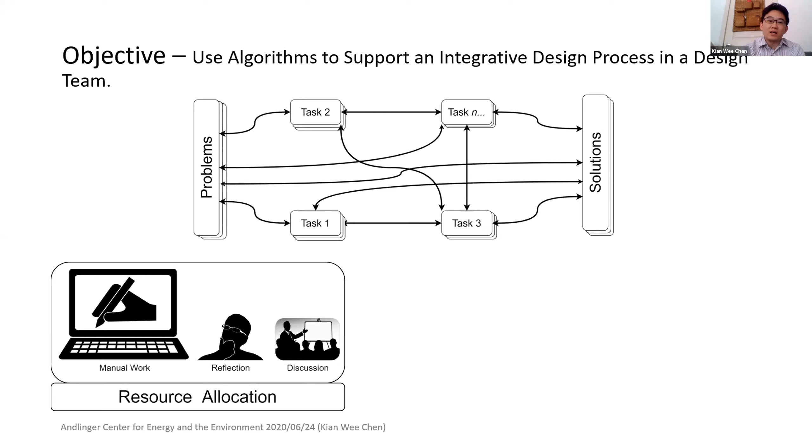The main goal is that currently we spend a lot of time doing modeling, especially in a multidisciplinary design team where you have to deal with different models working together, different protocols, hardware, software, interfaces, such that you spend more time trying to get this task ready than having time for reflection and discussion.

The whole idea is that you can inject algorithmic work into the process so that a lot of this routine task can be automated—what I call algorithm-assisted work—giving you more time to spend on reflection and discussion between different disciplines, where most of the time we do not have a common ground or platform to understand the problem well. So the use of computation and algorithms would help us have better interpersonal communications and discuss intersections between disciplines.

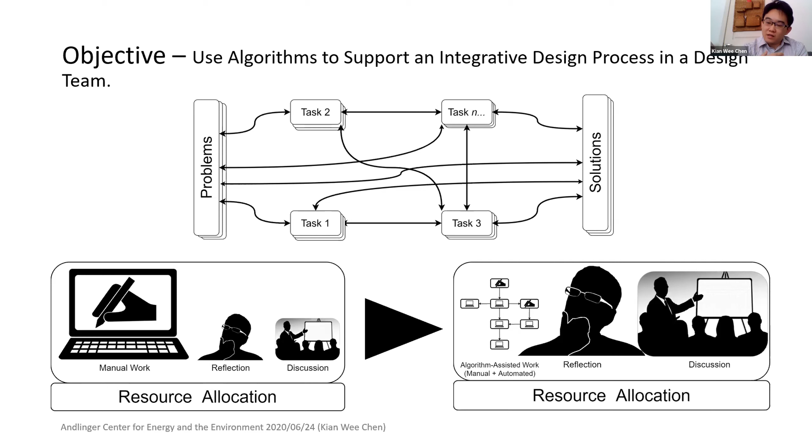I will use four projects today to illustrate my research, and how algorithms can be used to facilitate an integrative process in the study and design of the built environment. The first project is where algorithms are used to...

...help acquire more high resolution data to better model the environment. The second project is about how we can use that to facilitate physical prototyping and feedback into architectural design.

The third project is about how this can be used to facilitate communications between researchers from different disciplines. And finally, the fourth project goes back to my background in how all these algorithms help in designing better buildings and built environments as a whole.

So I will start with the first project, which is called Processing Terrestrial LiDAR Scan Trees for Multidisciplinary Analysis. These projects are not arranged chronologically, but rather task-wise and events-wise, to give everyone a broad overview of what my research is about.

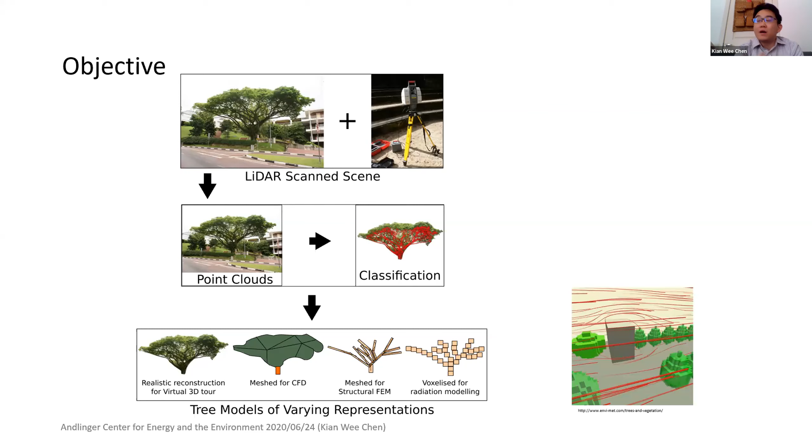You can use that information, for example, to better account for carbon accounting, where trees are essentially seen as carbon sinks—by being able to have a more precise volume of a tree, you can better understand how much carbon the tree is capturing, which is very useful for understanding the environment. Or you can use it to run environmental simulations like CFDs on a city scale.

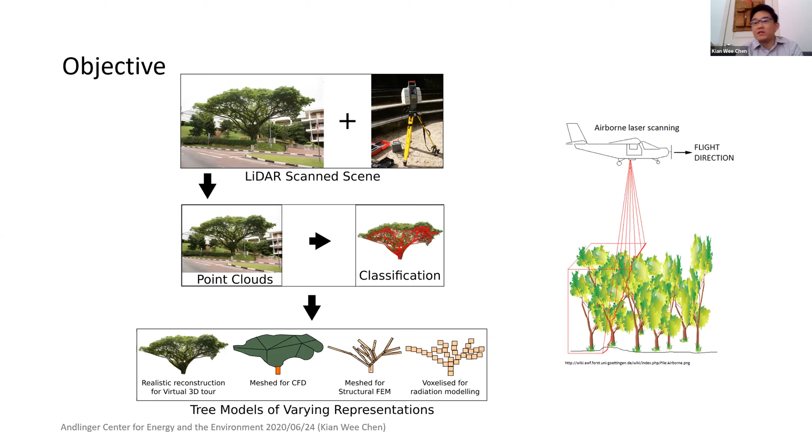Or for remote sensing people, they use terrestrial LiDAR scans as a way to calibrate airborne LiDAR scans. So it's very useful to be able to process this data and use it in all these different analyses.

So a lot of researchers from different disciplines want to make use of the data, but it's really difficult for them to access this data. So this is kind of what it was like before.

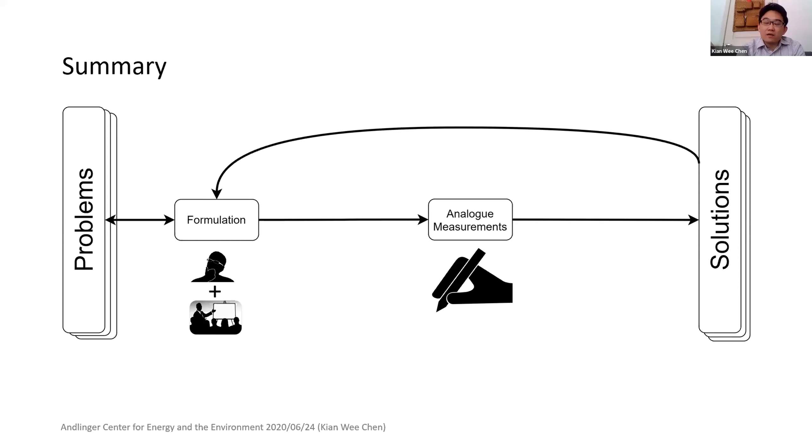Before all these researchers used terrestrial LiDAR scans, they would think of ideas and measure with less resolution sensors, and they would spend a lot of time to figure that out and then arrive at the model.

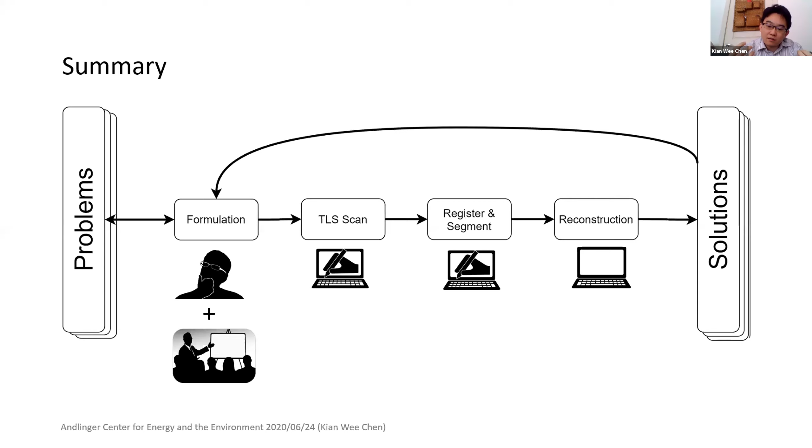This project is interesting because we are introducing a new technique, new software and algorithms, to make this process much more streamlined and be able to get the resolution of data that's not possible without this hardware and software integration.

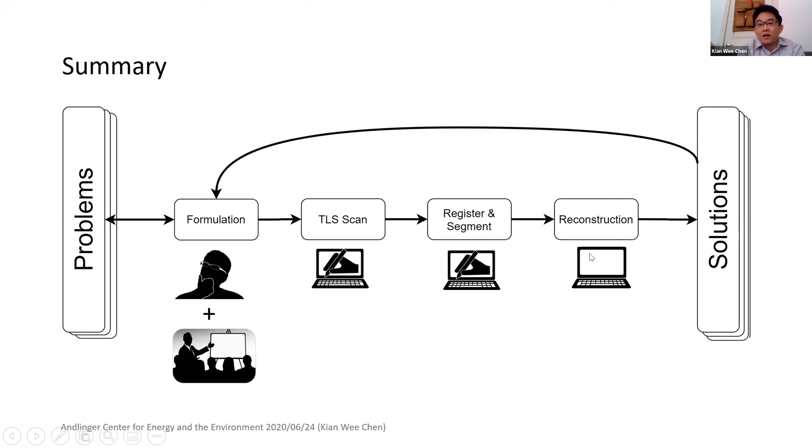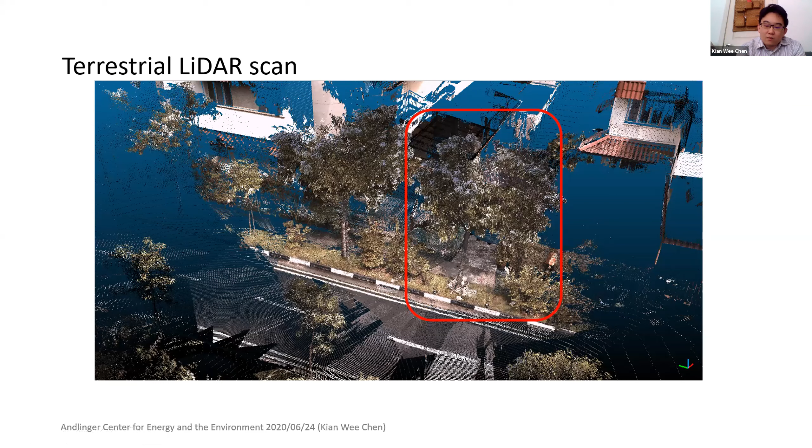So what I contributed to this design project was I came up with a streamlined workflow, using existing algorithms, existing software or open source software, and sometimes developing or implementing my own, gluing them together into a streamlined workflow so that it's easy for anyone to repeat or acquire this data.

But it starts all the way right back to the start, where you have to actually look at the hardware itself. In order to perform this, to acquire tree data, you need to look at the specification of the LiDAR scanner, where it has a certain wavelength, in this case 1550 nanometers, so that you can classify and separate the difference between points that's the leaves of the tree and points that's actually the branches and trunks.

And you also have to scan from multiple angles to capture a full representation of the trees at the same time. So once you have run the scan, you have to register the different scans together to form a single scene, and then you have to segment and classify it.

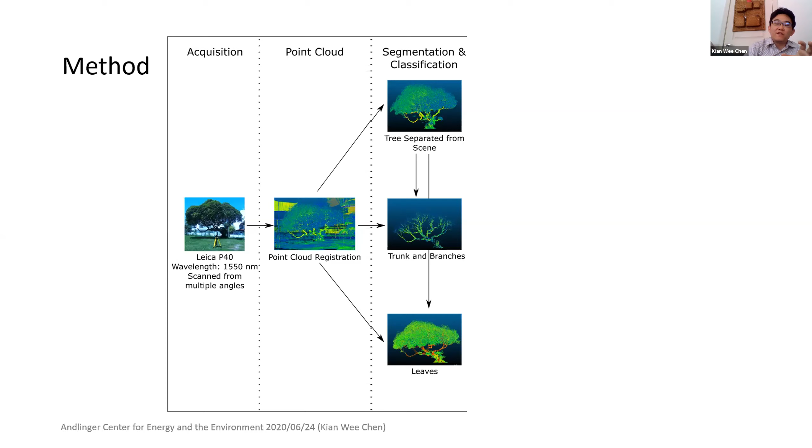As I said, because of the LiDAR scanner used, it's much easier to separate the leaves from the branches, because the leaves and branches return different intensity when a laser is shot out and hits a leaf versus a branch. The intensity return of the laser is different, and it makes it much easier to separate the branches and the leaves.

So once you have separated it, you would apply different existing algorithms to reconstruct the trees. For example, for running city scale CFDs or wind analysis, it will be useful to represent the trees as voxels, each with certain attributes, for example whether this voxel is a leaf voxel or a branch voxel, for calculation.

And you can also use it to calculate leaf area index, which in landscape architecture is usually used to classify trees, having a correlation between the leaf area index and the species of the trees.

Specifically for this case study, we are interested in the above ground mass of the tree. So we reconstructed the branches of the trees and skeletonized the whole branch structure, and using a tube piping model we were able to reconstruct the tree volume.

As you can see from the varying resolutions, you can even separate the different branching orders. Branching order 0 would be the trunk, then the secondary branch, and further on where you have different branching orders. We can study the different architecture of the tree, and also at the same time obtain the above ground mass of the tree.

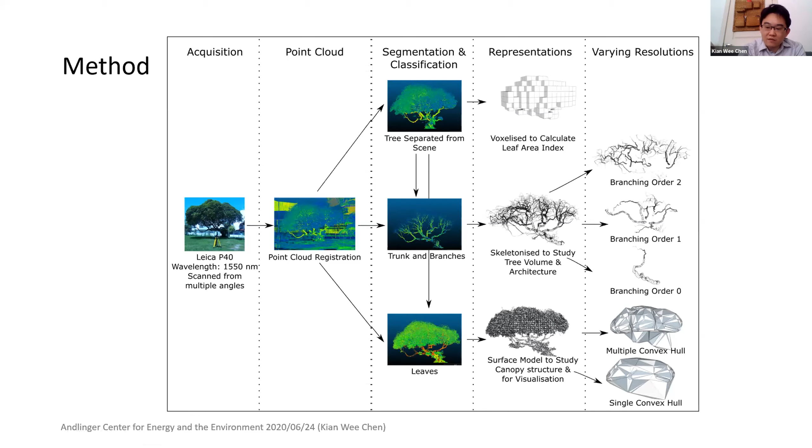The result was, with this algorithm and workflow setup, we went around a neighborhood in Singapore and scanned 66 different trees, sampled in terms of size and species, to get a good sampling of the trees in the neighborhood. Out of the 66 trees, the algorithm worked for 65, except this tree.

Essentially because in the tropics, trees are really lush. Trees like this are essentially covered with leaves, and it's impossible to segment the leaves from the branches. Because of that, the algorithms couldn't reconstruct the tree at all, since it's just a huge lump of point clouds. So there's always, of course, a limitation to this workflow.

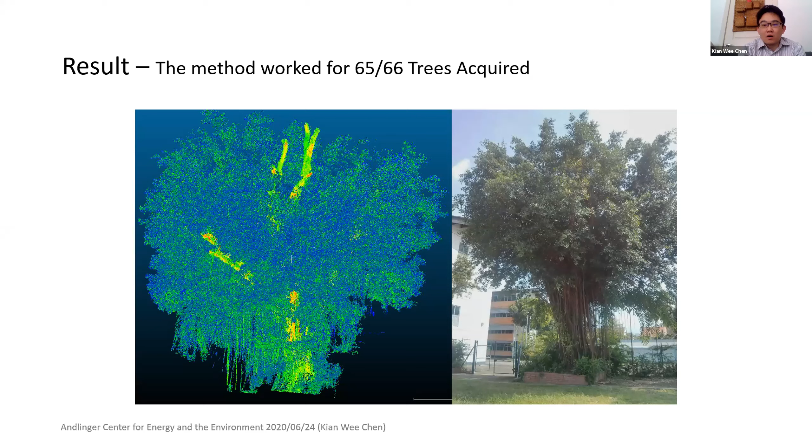But other than that, we were able to have algorithms to calculate the various biophysical attributes of a tree, such as leaf area index, as compared to the traditional way of using a leaf area index meter and a hemispherical camera. So the use of terrestrial LiDAR scan derived leaf area index has been seen as a more accurate way of getting the leaf area index of a tree.

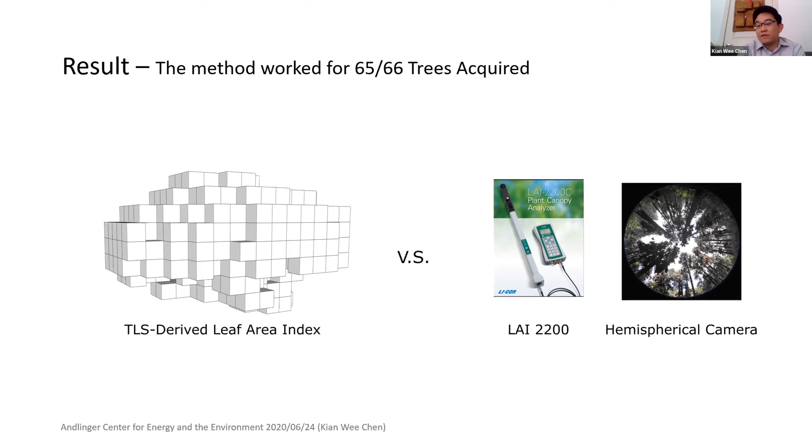We also have the TLS derived above ground biomass, as compared to the more common allometric equation that's used by most forestry and urban climatologists to estimate above ground biomass of a tree.

With the data we collected with my colleagues, we were able to set up a much more high accuracy allometric model, specifically for tropical urban trees, because the growth of tropical urban trees is different compared to the allometric equation used in forestry, since in urban landscapes essentially all the trees are pruned and there's limitation to their growth because of buildings and obstructions.

So the derived allometric equation was much better in terms of estimating tree volume in an urban setting. Interestingly, with the improved estimation of above ground mass, my colleague was able to have a better carbon accounting model, with a more interesting finding: a lot of times the planting of trees in urban areas has been seen as trees being a carbon sink in an urban area.

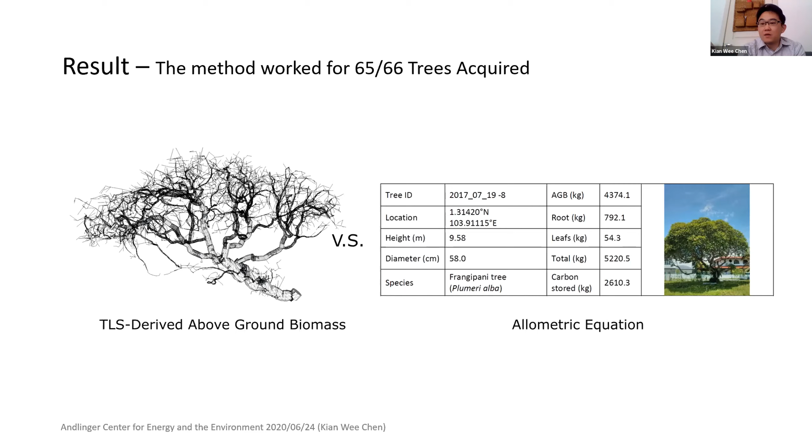So for the second project, which was done when I was at the Andlinger Center with Forrest and many other colleagues, is the Cold Tube project.

In this project, models, algorithms and computation are used in a different way, where it helps to translate the result of a physical prototype into the design process. Let me illustrate that with this project.

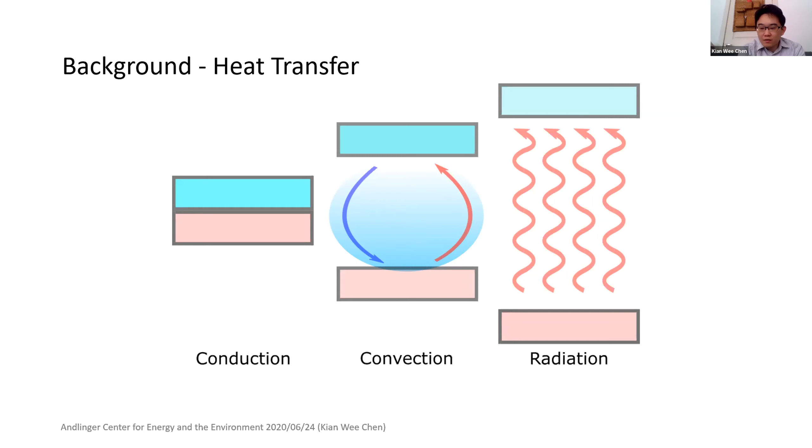Just a quick background: the three primary heat transfer mechanisms are conduction, convection, and radiation, and their relationship with a building envelope.

I'm sorry, I think I accidentally jumped out of the screen share.

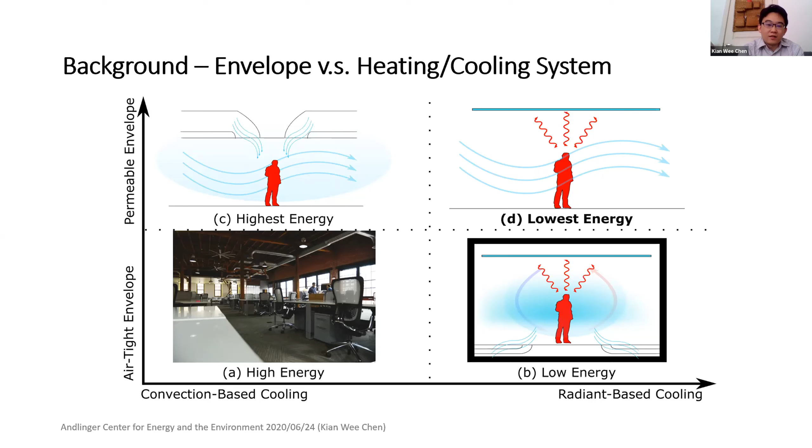In building applications, most of the time the most common way of cooling is essentially high energy air conditioning, where most offices have an airtight envelope, and you cool down the air, and then the air cools down the occupant. That's the conventional practice.

But there's also a method gaining traction where we look at radiant-based cooling, where we have cooling panels using radiation from a cooled surface to cool down the occupant. Because radiant-based cooling is more efficient, it's lower energy.

Of course, the highest energy option is essentially having a permeable envelope but still using convection-based cooling to cool down the space.

This is a picture I took back when I was in Singapore, where they have an outdoor cooling unit throwing cooler air into the open environment to try to cool down the space by a few degrees to make it more thermally comfortable, which would essentially cause much higher energy use.

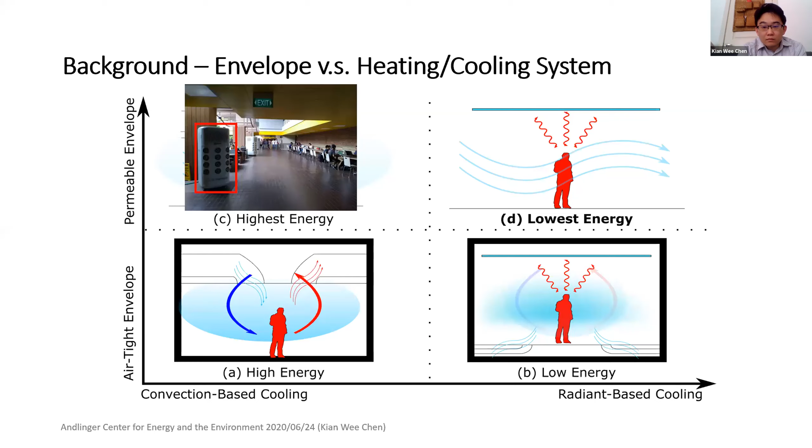Lastly, the lowest energy approach would essentially be to do radiant cooling on the occupants while allowing natural ventilation to provide some form of convection cooling at the same time. That would be the most targeted way to cool a person and create thermal comfort, but at the same time with the lowest energy.

But essentially, the main issue with this in a hot and humid climate is that the ambient humid air would cause condensation to happen on the radiant surface, which is of much cooler temperature and below the dew point temperature. So in the Cold Tube project, this is what we were interested in testing out.

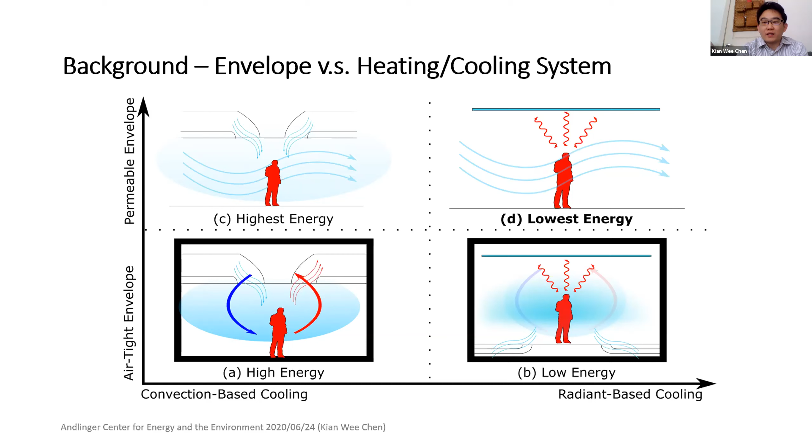So can we do that? That's why we built a 1:1 prototype back in Singapore, where we have hot and humid climate, to actually test radiant cooling outdoors.

So from what we know, this is one of the first environments engineered like this in the world. I can give you a brief description of how we achieved that without having condensation on our tube surface.

So essentially, we call this the membrane assisted radiant cooling panel, where there is a thermal transparent membrane that still allows the occupant to be radiatively cooled by the tube surface shown in the water pipes. This physical separation separates the ambient air from the tube surface, so there's no condensation on the tube surface, while still affording radiative cooling of a person.

So this is a totally different cooling paradigm, where in a building usually we try to cool the space instead of the occupant. For this use of radiative cooling to be more targeted at occupants, we're aiming to cool down the occupants instead of the space. That's a whole different way of cooling.

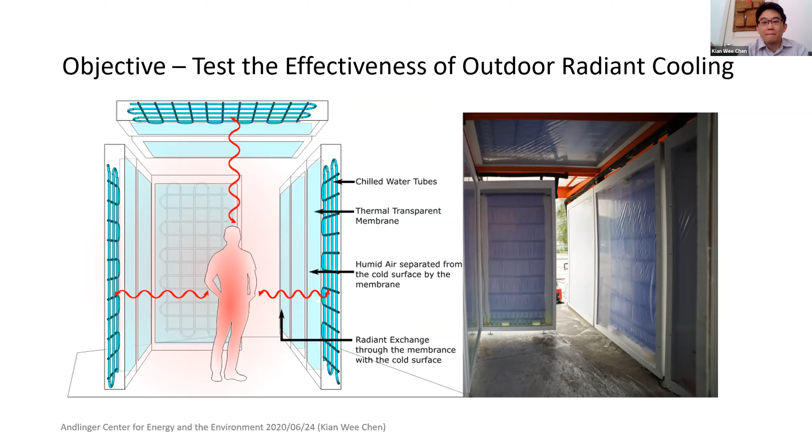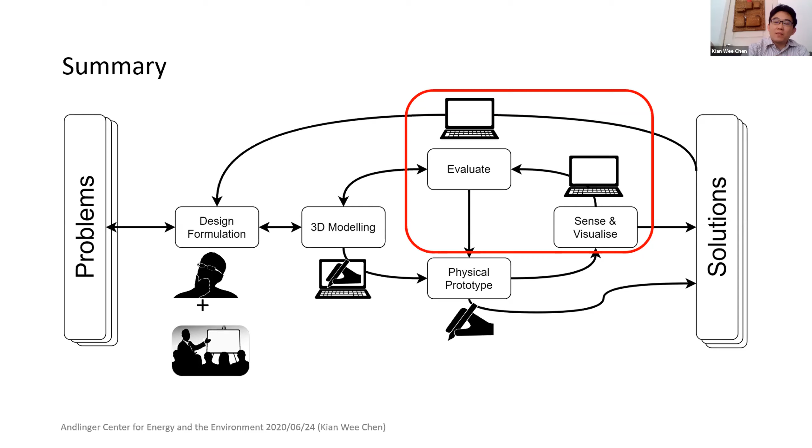So just to give a summary of how the algorithms are injected in, essentially we streamline the workflow between sensing and visualization, translating that data to a model to evaluate how this can be fed back into the architectural design process.

The Cold Tube was built, and different measurements were set up, and through the project we also found out that because the environment created by these radiant panels is so novel, certain measurement apparatus conventionally used to measure a conditioned space can't be used in this environment, because of the huge separation between radiant temperature and air temperature.

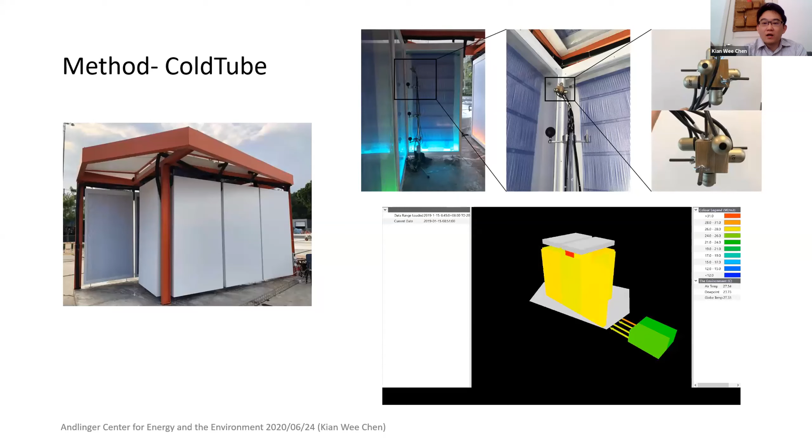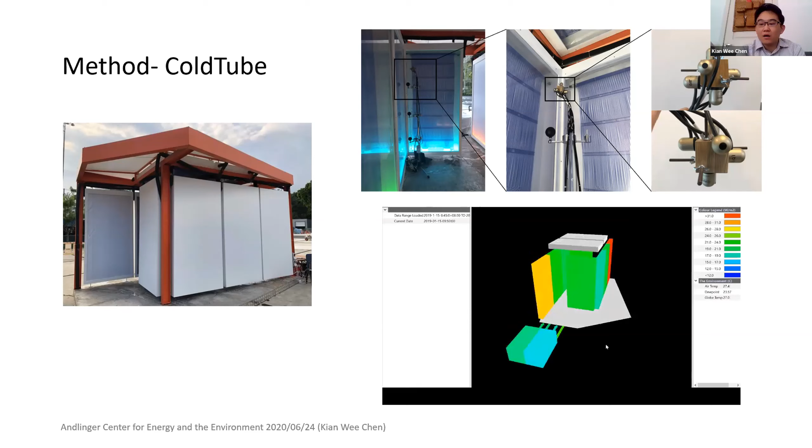Of course, there's the collection of data and how to visualize it. The video is showing how the panels cool down as we switch on the system. That helps us understand the performance of our pavilion and how we can improve on it.

There are probably two main primary mechanisms here cooling down the wrist area, but looking at the air temperature, which stays similar, the decrease in water temperature and the increase in heat flux essentially shows that we can control radiative cooling and convection independently.

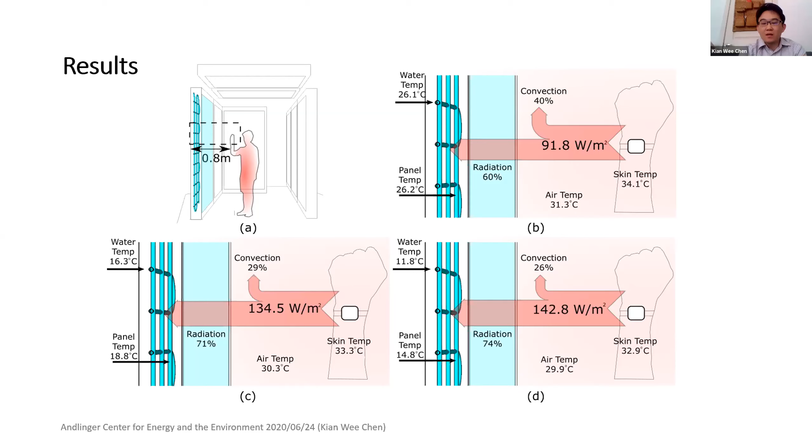We also conducted a thermal comfort study, which is more of a physiological measurement, considering whether this system can purely radiatively, primarily through radiant cooling, create a comfortable environment for the occupants.

We did thermal comfort studies where we surveyed people who went into the ColdTube, asking whether they feel cooler or not. From initial studies, we found that the ColdTube was actually able to provide a thermally comfortable environment for our occupants, for our participants.

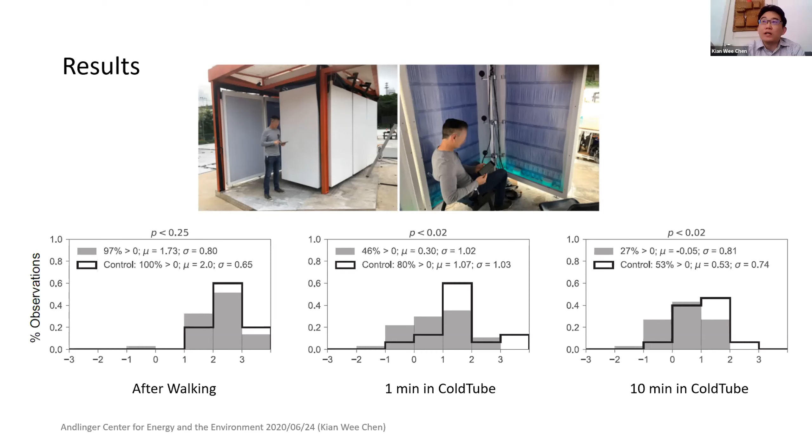With this, we are quite happy. We're really glad that this is a new way of cooling, a new method of cooling, and thinking about how this can be applied in design, and how it changes the way we design cooling or HVAC systems in a building.

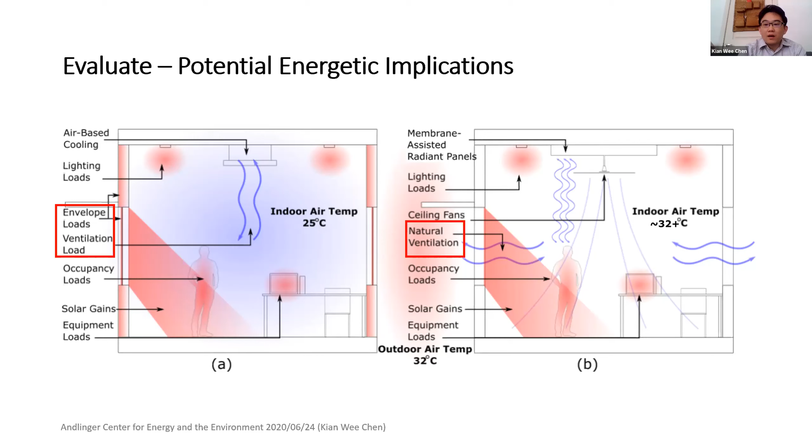So that has a repercussion to the whole building design field, that air conditioning doesn't mean a sealed airtight envelope. These findings translate into design implications, and we'll apply them to a case study where, back in Singapore, public schools are usually naturally ventilated with a ceiling fan. So if we want to create a more thermally comfortable space for students, what do we need to do?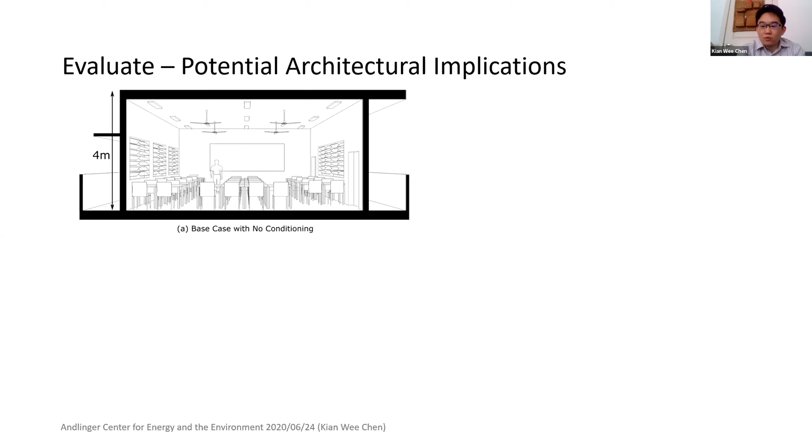So in A, that's the base case of what's existing, a naturally ventilated classroom. B is if the ColdTube setup was adapted to a building, an interior building. The main design implication is you have to rearrange the ceiling space to make sure there's enough surfaces to cool down the occupant.

This in comparison to C and D, where C is the most common way of conditioning a space with an air conditioning system, where you have to have a closed envelope, while D is where you have a centralized system. In C, when you're using a decentralized split unit, essentially there's no fresh air intake, which would cause a deterioration in indoor air quality for the students. But if you want fresh air intake with better indoor air quality, you might need a centralized system where you bring in fresh air intake, but that has certain implications in terms of ducting spaces.

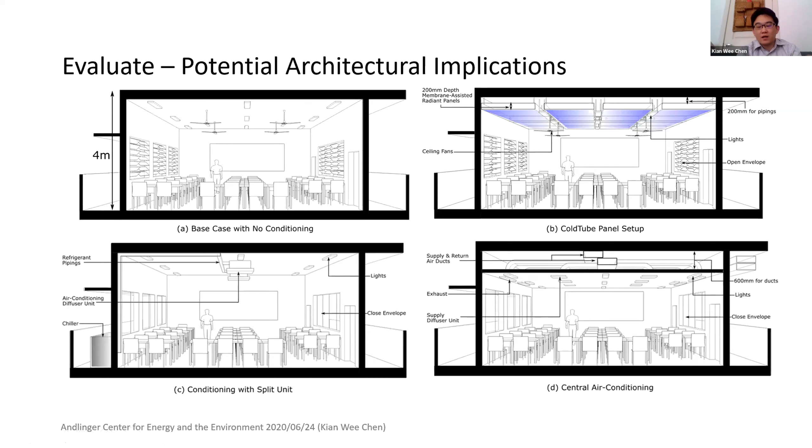So from the physical prototype, from the data that we got, we were able to translate it into a simple thermal model and use it in the design process to figure out the implications spatially and at the same time energetically.

So with this, we have an idea of where our system is in comparison to existing systems, and from here, future investigation would try to improve our systems in comparison to these conventional systems.

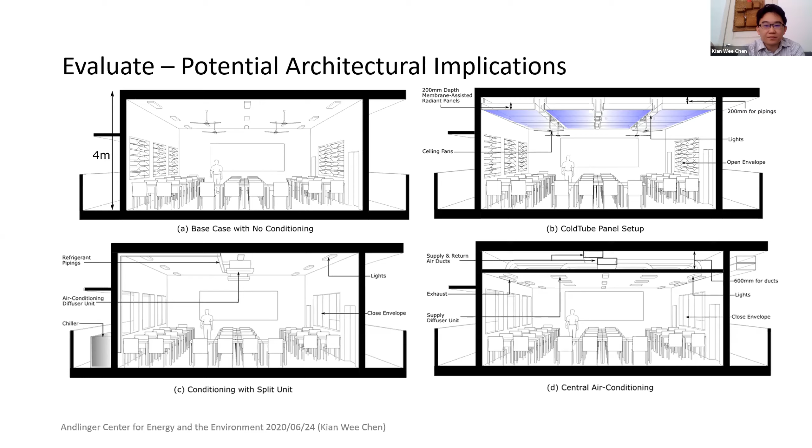So this is the second project, and for the third project, it's more about the communication of data, different data from different disciplines in a design team. So the idea is to use 3D modeling techniques and visualization to help researchers quickly see relationships between data of different disciplines.

So for example, in these two examples, we're seeing two dimensions of data, where color means one attribute and extrusion is another attribute. On the left hand side, the color diagram shows the distance to a nearby subway station, and the extrusion shows the existing real estate price. So you can overlap different data onto each other and try to find research gaps between different fields for investigation.

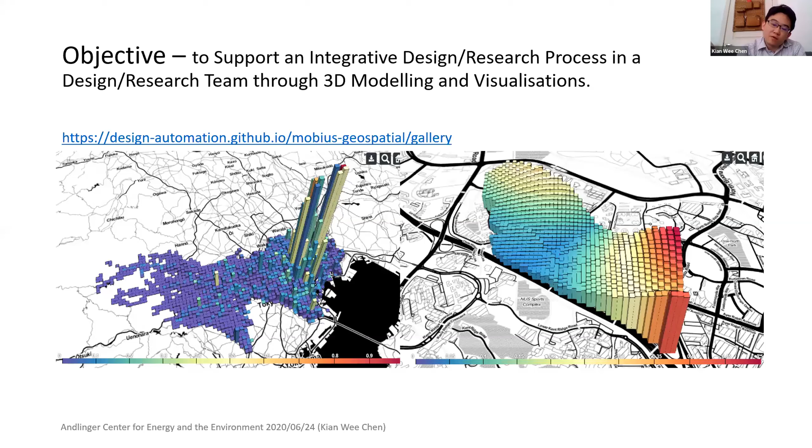So the context of this project is looking at the Campus as a Lab program in Princeton. Essentially, the Campus as a Lab program encourages researchers in Princeton to conduct their research on campus using the Campus as a Lab. Campus funds a lot of different projects, and for each project, when done, a report is submitted to Campus as a Lab.

The data and how all this data is accessible is unclear. Currently there's no central infrastructure to make data more accessible to the campus as a whole, although Campus as a Lab is funding all these projects. So it would be really nice to set up a system to make data more accessible, to visualize and overlay data from different projects onto each other, and to see if there is a gap, or maybe there isn't. We need that infrastructure to make it more accessible to people.

Our lab has a project from Campus as a Lab, and we are looking at powering all the golf carts on campus using PV panels. Essentially that would require us to visualize and analyze two main sets of data. On the environmental side, we need to visualize the solar irradiation data in the campus, and at the same time the movement data of the golf carts.

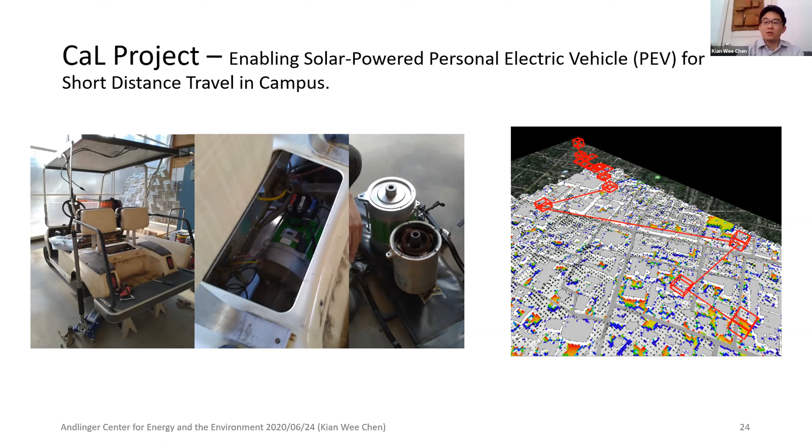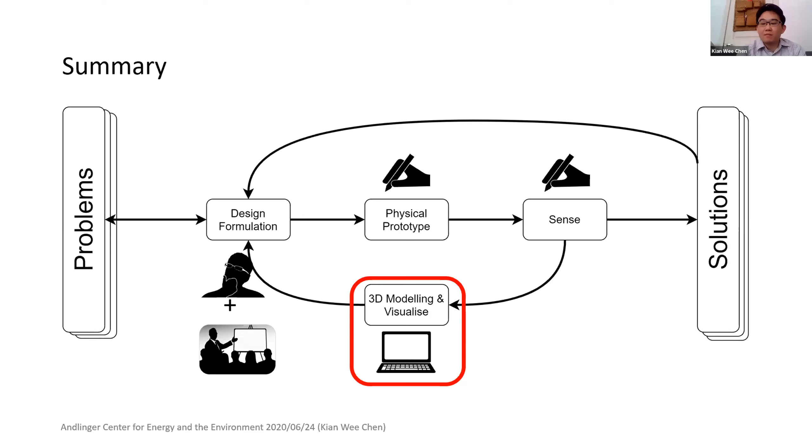But currently we do not have a central infrastructure to do that. So what this project is about is to create a central database to be able to visualize different sets of data and overlay them together.

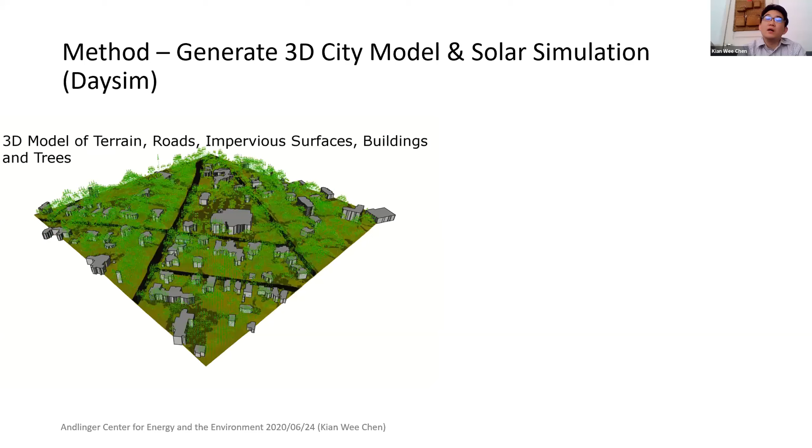How I go about doing this: essentially we have to first build a model of Princeton University. You can request 3D data from the Princeton campus, but it's not openly shared. So the approach we took is we gathered all openly available data, and using different sources, we consolidated them and built a 3D model as shown in this GIF, where we were able to estimate the tree heights.

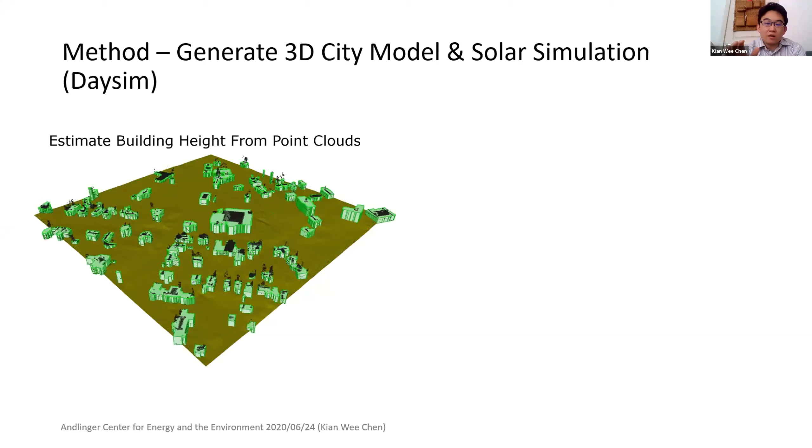We were able to get the building heights and building volume. We have the terrain information, and with that we can run a solar simulation to figure out roughly the different solar irradiation throughout the campus.

So we can overlay the solar data with the movement data to find out, as the golf cart parks, where would be the optimal parking area for a golf cart when it's not moving, so that it can maximize how much it can recharge its battery.

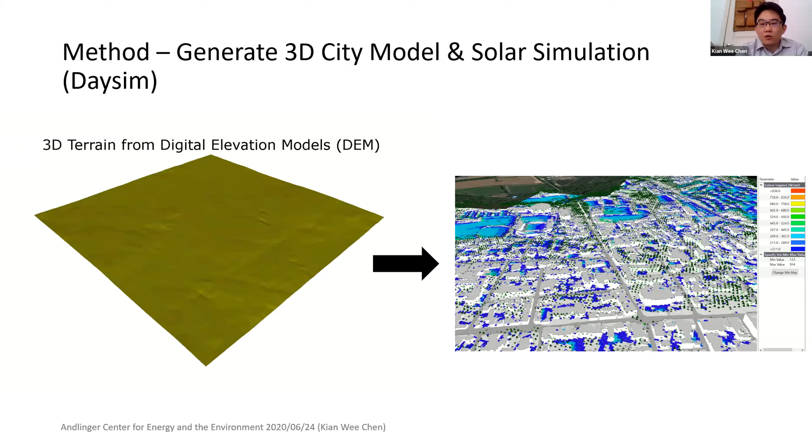So first I set up the 3D model, and following that the model is distributed through a simple app, where you can download the app, download the data, explore the data, and switch different sets of data on and off. You can have an animation showing how the movement and solar data coincide, and figure out where would be the best place to park your golf cart so you can power it with solar power.

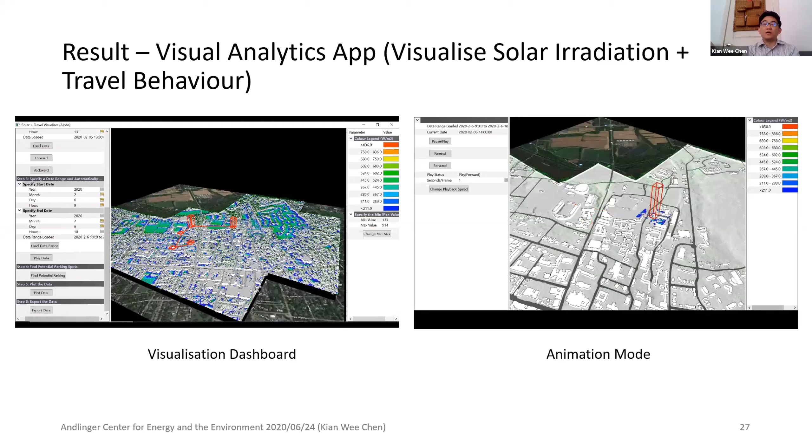So this is just a pilot study to try to figure out how to sort this data, how to distribute it, how to have access to it, and how someone can explore this central database. That is kind of the end of the third project.

And the last project is essentially coming back to design, where, looking at the previous projects which were mainly about research and prototyping, I wanted to see how this comes back to design, and how you make use of different algorithms in the design process to generate better designs.

This project is one I did back when I was in Singapore, a 2-week workshop where we enabled students to quickly use these algorithms in their design. They were year 1 or year 2 architectural design students who usually have difficulty implementing these algorithms in their design process.

As you can see from the diagram, the biggest break has always been from 3D modeling, and how you connect to parametric modeling and generate many different designs, how you run optimization algorithms, and how you actually evaluate your design in terms of environmental objectives.

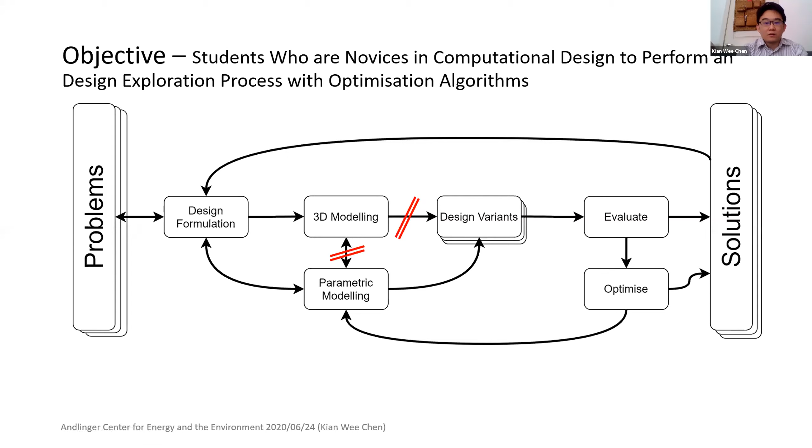So what we did here was a 3-stage design process. We slowly introduced algorithms into the design process so that the students know what the algorithms are doing, so they're not just mindlessly or aimlessly clicking software or learning software, but rather as algorithms are introduced they understand what's happening. The first stage is essentially a design brief.

They would think about a design formulation, model their design, and then generate different designs. In the first stage they will evaluate their design, and essentially they would repeat it—it's an iterative cycle. So the first stage's only automated or algorithmically injected task is the evaluation task.

In the second stage we introduce parametric modeling to them, so they can generate many more designs. In the third stage, an optimization algorithm, which can fully automate the search for good designs, is introduced, so they can use it to generate designs in their design process.

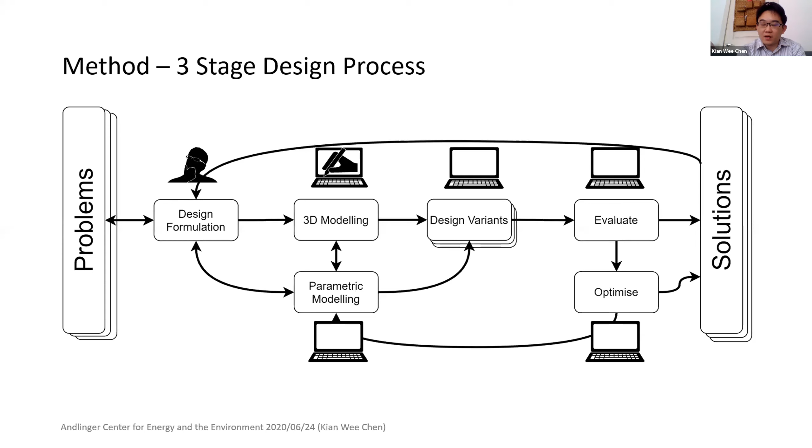So I'll walk through the different stages, and essentially all the tasks are automated, which leaves the designer's main task as reflecting and thinking about what would be the best design, instead of figuring out how to model or set up the process. So in the first stage, concept exploration, evaluation is the task that was automated.

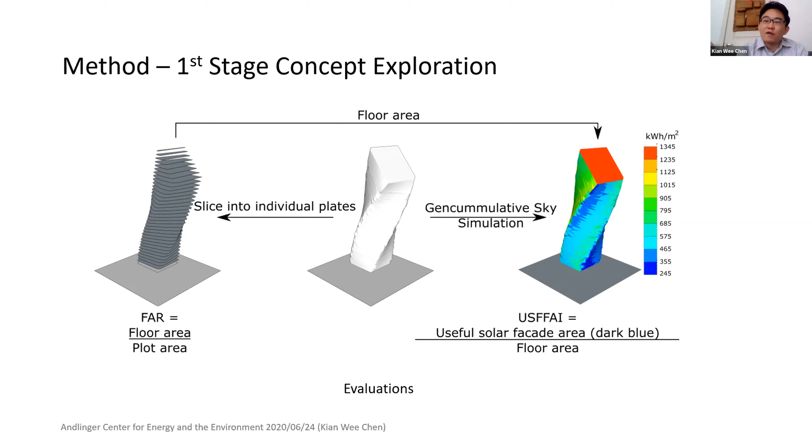Evaluation was automated by running a solar simulation on the building to figure out if this is the optimal solar irradiation received for a certain building form, and at the same time calculating the build area. So you want to both maximize the floor area, but also reduce the solar irradiation, to have optimal solar irradiation on your building's facade.

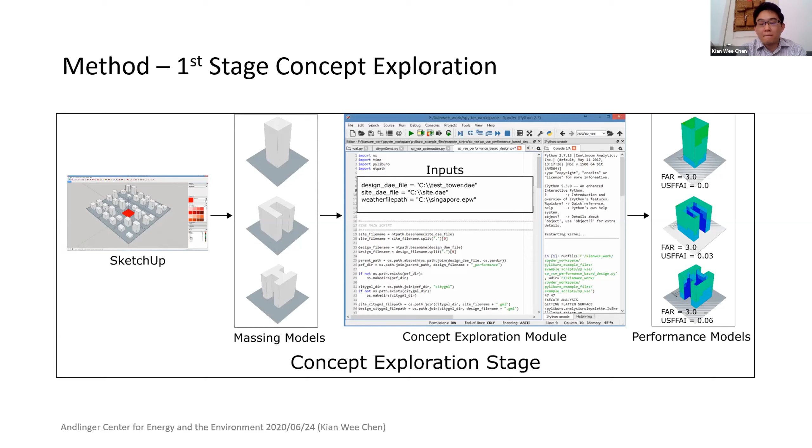This was the interface set up for the students, where they would model their building in a 3D modeling software commonly used in architecture, creating 2 to 3 different models. They would input it into a script I wrote for them, specifying where the files are, and they'd receive feedback on the performance. So students could quickly see how their designs affected the performance. That's the first stage.

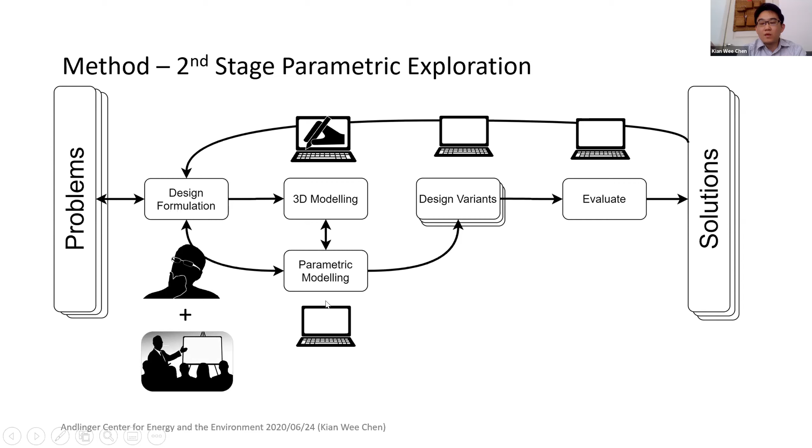In the second stage, we introduced parametric modeling, where students are able to quickly change the building form of their design—they can twist it, specifying parameters like changing the height, and twisting using morphological operators to parameterize the building.

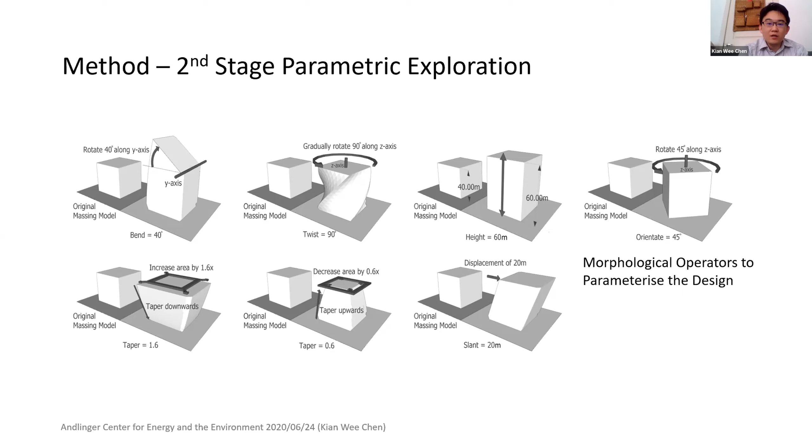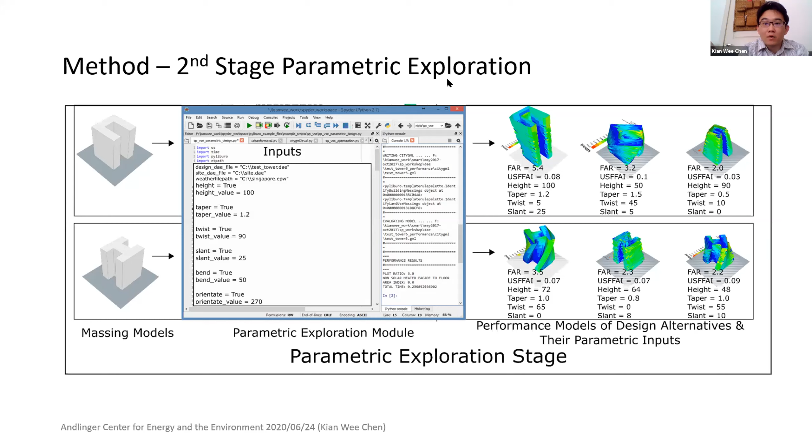Students just have to specify a massing model file, and they can specify what twisting or slanting they would want, and they'll be able to generate different design variants along with their performance feedback at the same time. So they can quickly vary their design and receive feedback on their designs. And lastly, we automated the optimization algorithm.

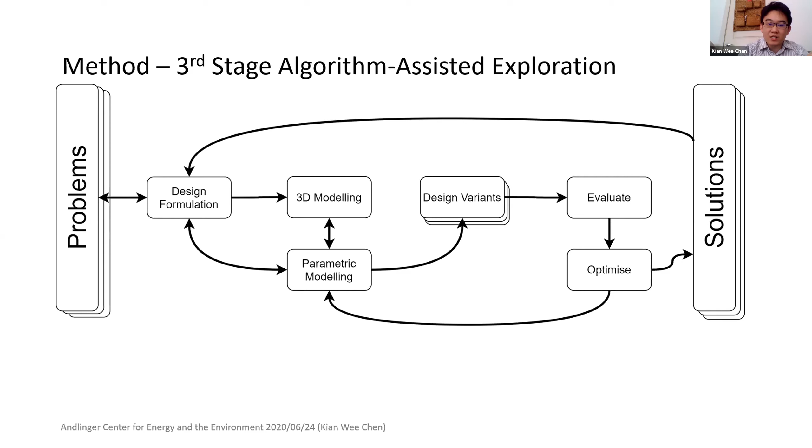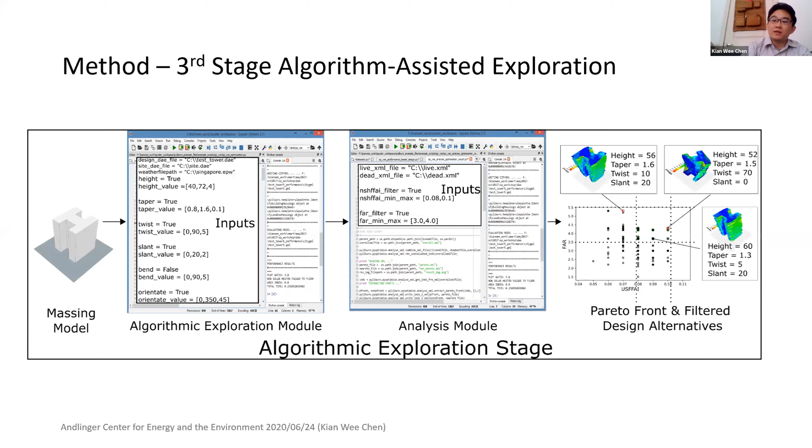You can just specify different ranges of the morphological operators, and the computer will automatically match up the parameters and generate hundreds of designs for the students. It was quite successful—out of the 28 students in the workshop, 27 were able to complete the exercise, and close to 5,000 different designs were generated by those 27 students.

You can see the various designs generated, and from this graph you can see that as more designs are explored, you can actually find better performing designs. So by automating the search for designs, we were able to help students find better design options.

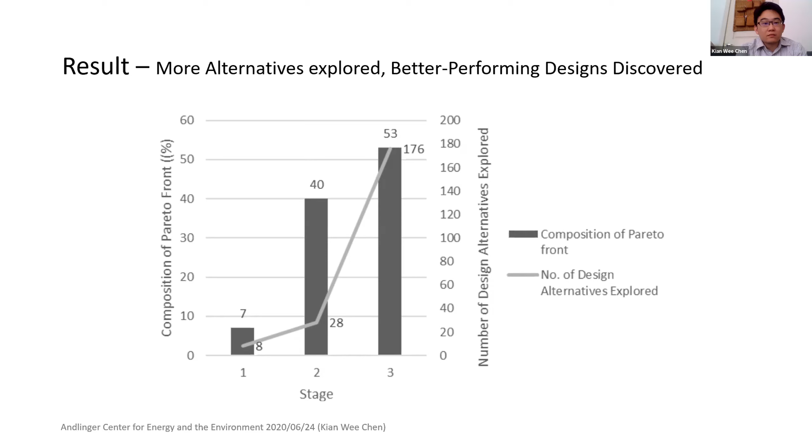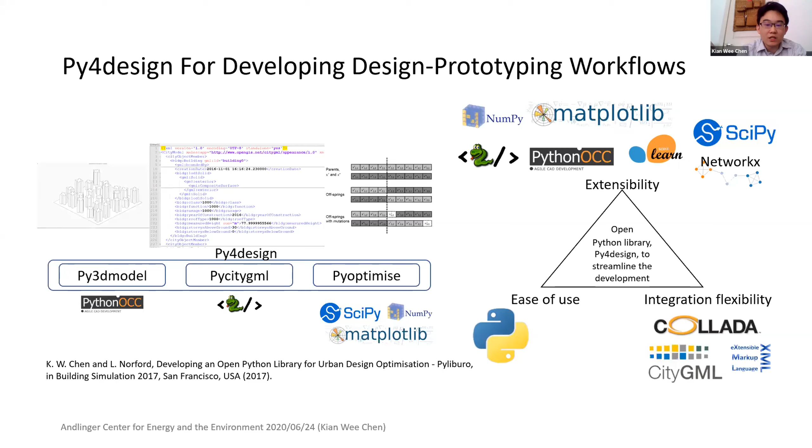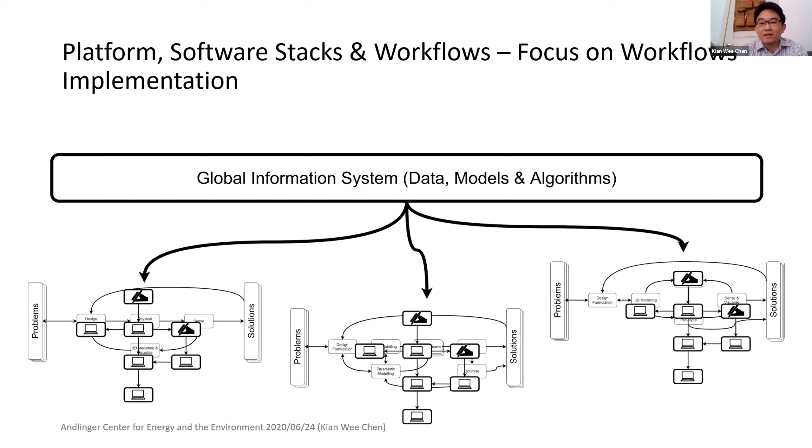So that's the 4 projects that give an overview of my research. Moving forward, all these projects were made possible by a library I developed throughout my research years, used to set up all this workflow and develop these algorithms. I would like to keep working on such a library to help rapid prototype various workflows for research or design, and integrate it into global information systems with data models and algorithms to streamline workflows and better help such a process. That's the end of my presentation. Thank you.